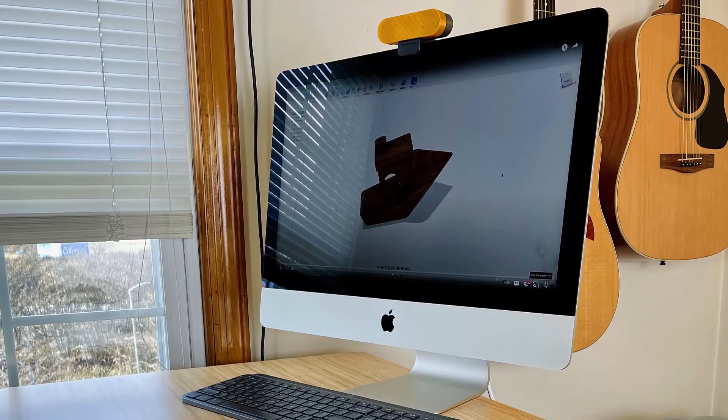those for this video. So I just bought this new motorized standing desk, and for some reason lately I've really been into desk aesthetics. A leather mouse pad, a new Logitech MX3 mouse with the matching keyboard. I decided that a charging stand that matched the design of my iMac would be a nice touch. So I designed my own charging stand and 3D printed it. It's my mini iMac watch charging stand.

I'll jump into the Fusion 360 design in a minute, but first let me walk you through my approach. I designed this in 3 separate bodies: the charger holder, the stand, and the screen. The charger holder is designed to allow the charger to have a friction fit. It's very satisfying when you get this just right. The stand attaches to the charger holder, and the slit to allow the cable through also functions as a spring to allow for a secure fit and easy removal.

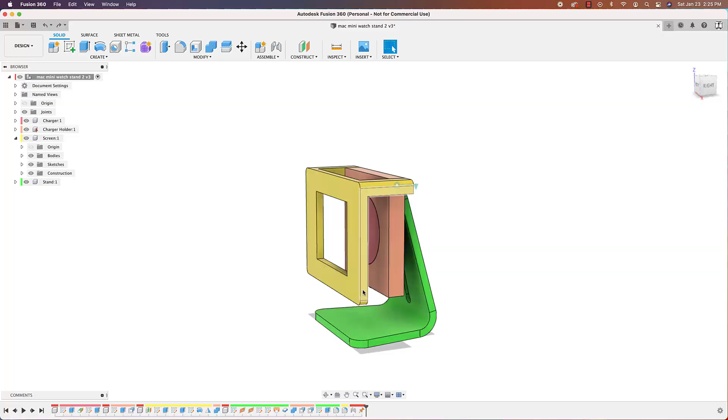Next, I wanted the screen to be able to swivel back, allowing you to easily place your watch and then simply swing it back into place. This type of hinge was created by modeling a little dimple that could rotate within a groove. These are excellent techniques that you'll want to take advantage of in your own designs.

After 3D printing the screen, I was able to easily snap it into place, and as you can see, the hinge mechanism worked exactly as intended. Now I can simply attach my watch and I've got the perfect smartwatch charging companion. You know, it's the little things in life.

This video is a bit longer than what I usually make, but that's because I cover a lot here. I'm going to approach this design by using components instead of simply making separate bodies for each part. You'll see the advantage of doing this as it keeps your timeline for each part neat and organized, so that it's going to be a lot easier to come back and make changes. Designing with components also gives you the ability to add joints between your parts. I'll demonstrate this by applying a revolute joint between 2 components.

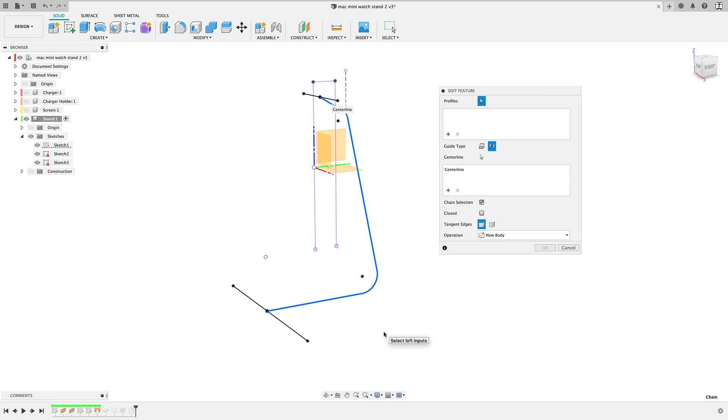I'll also touch on how to approach designing 2 parts that need to fit together, and I'll even jump into the surface environment to show you a neat trick to loft lines together to get unique shapes. I use this approach to easily design the stand. Alright, I've got a lot to cover, so let's dive in.

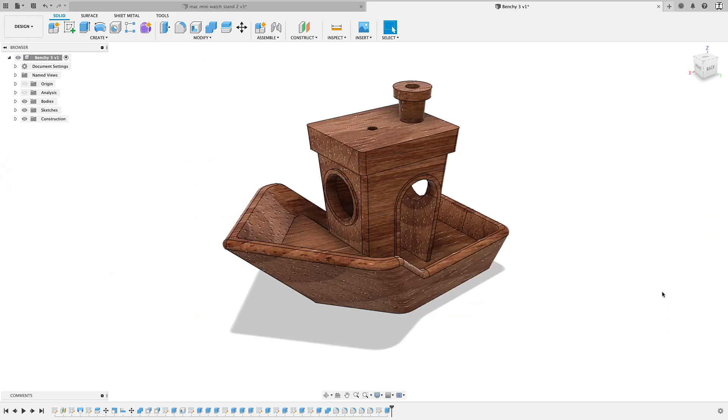Alright, let's dive into Fusion 360. We'll begin first by modeling the charger unit here. And if I remove the rest of these components, you'll see it's basically just an extruded circle, and the bottom part here, that stem that represents the wire coming out of it, is basically the same thing.

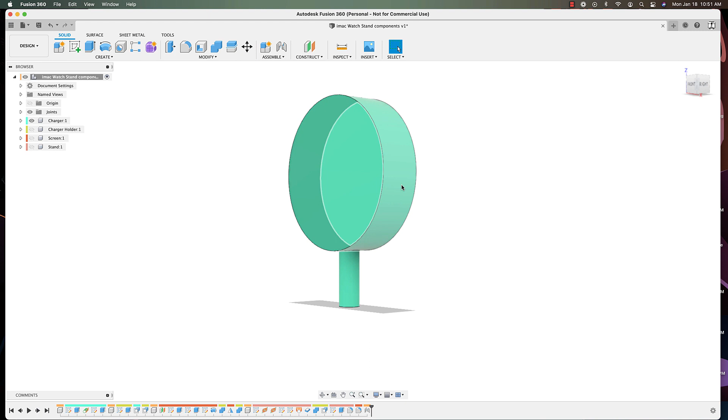So we're not going to 3D print this part, but you'll see that it's really important to actually model it because the rest of our design is going to be dependent on this part fitting perfectly within the parts that I'll actually be printing. So I'll create a new design here, and let's first save our design. So I'll just click save and give it a name.

We're going to tackle this design with components instead of just creating bodies. So we'll first right click and go to new component. I'll give it a name, and I'll just call this charger. Enter, and then we'll create a sketch on the ZX plane here.

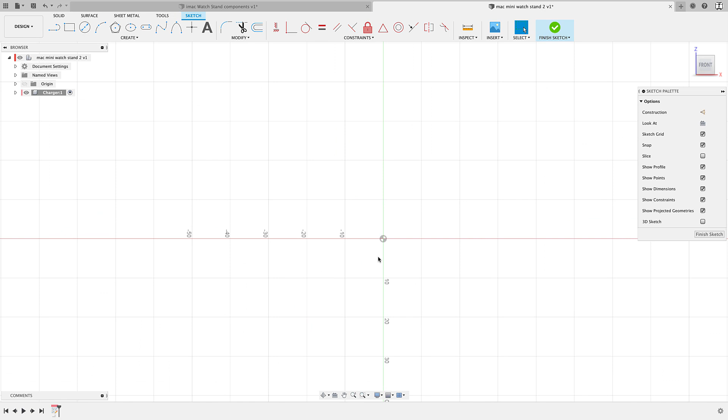I'm going to start with a circle, so I'll hit C on my keyboard for center diameter circle. I measured this with my caliper, and it's a diameter of 27.6 millimeters. I'll create that, finish sketch, and E for extrude, select my circle here, and then we're going to go out 7.6 millimeters, which again, I measured with my caliper.

Now you'll see it came in red. When you're working with components, you can have it automatically toggle colors of your components by hitting Shift N. So you can see it goes back to the default color, and if I hit Shift N, every new component I create is going to get a new color, which makes it easy to distinguish components. Also, you'll notice on the timeline here, it'll separate your timeline by the color of that component.

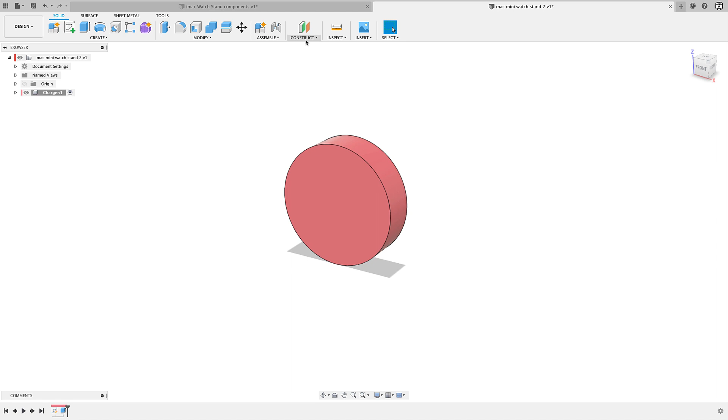Okay, next, to create the stem part that comes out of it here, where our wire is, I'm going to start with a tangent plane. So I'll go to construct, down to tangent plane, and I'm going to select that bottom surface, and it's going to create a tangent plane right there. I can change the degree here by moving that widget, but I'm going to leave it where it is.

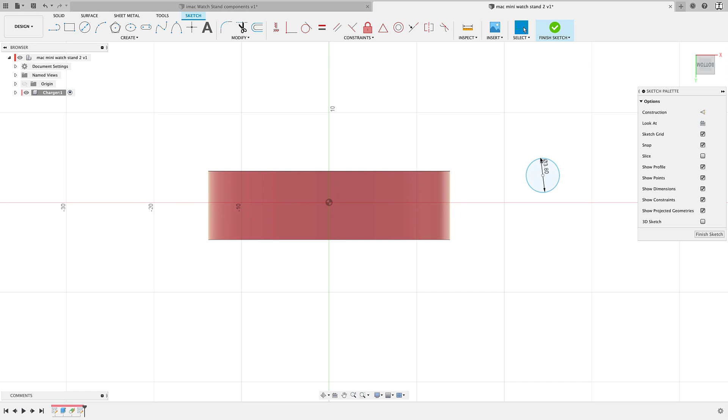Click OK, go to create sketch, choose that bottom plane, and then I'm going to create another circle here. C for center diameter circle. Now I also measured the wire, and it came in at 3.8 millimeters, so I'll type that in. And L for line, I'm going to draw a line going right down the middle here. And then I'll select that line, hit X to make it a construction line, and then I'm going to move the circle into place with just one click.

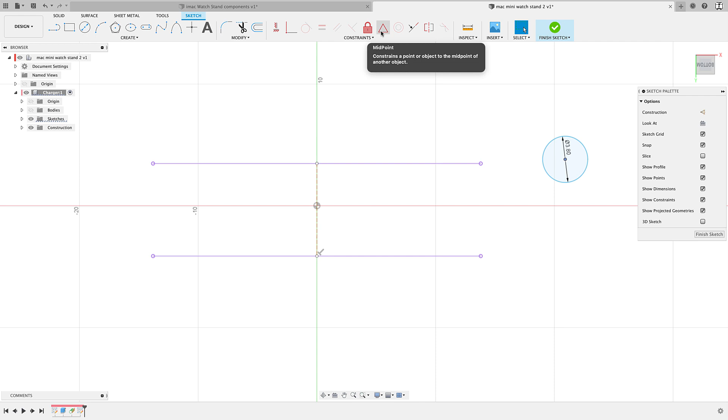Here, let me remove the body there so we can see that line a little better. And the one click is simply enabling my midpoint constraint. I'll click on the circle, click on that line, and it's going to put it right on that middle there. Okay, next I'll finish that sketch. Let's bring the bodies back into view.

E for extrude. I'm going to extrude this down 10 millimeters, and then we're going to go to where it says direction. We're going to change that from one side to two sides. We're going to bring that up. Now be careful, because once it's going through an object, it thinks you want to cut, so I'll have to change that back to join. Click OK. All right, and that's our first component there, and that's our charger.

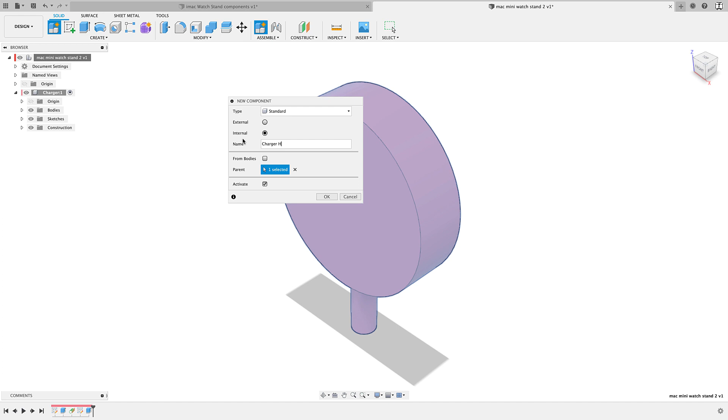Okay, next we're going to create another component, and to do that we're going to right click on the top of our browser where our name is here. We're going to go to new component, and we'll call this part the charger holder. This is what's going to hold the charger in place. So if I go back to my previous design, that's going to be this part right here.

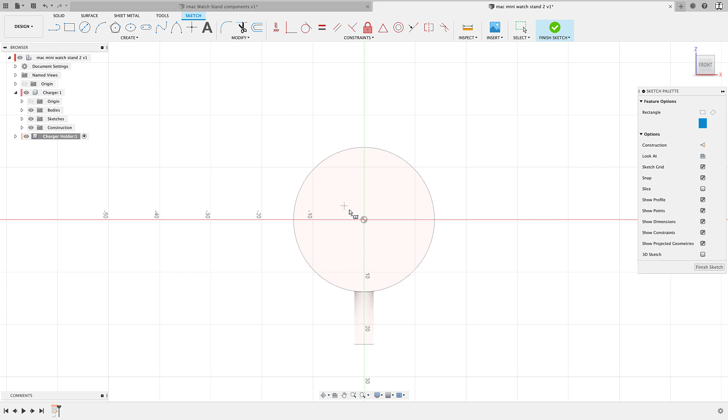Okay, so to do that, we're going to create a sketch on, again, the ZX plane, and I'm going to start with center rectangle. So create, down to center rectangle. We're going to reference that origin there, and this is going to be 45 by 45 millimeters. So we'll create that. Now what I want to do is extrude this out. If I click on this profile I just made and hit E for extrude, it's basically just going to extrude that block.

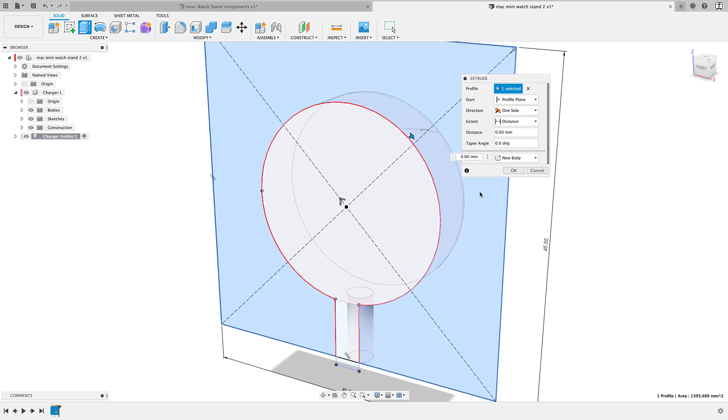But what I want to do is extrude around the charger I made, and this is where modeling that charger first really comes in handy, because what I can do now is project it. So P for project, and I'll click on bodies here, and I can reference the outline of that charger. So I'll click on it and then click OK, and there's that outline. Now if I hit finish sketch, E for extrude, it's just going to extrude the profile between my square here and that projected body.

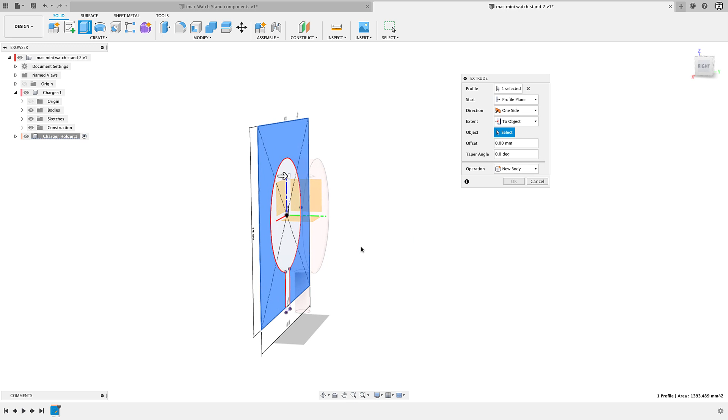Then I'm going to extrude that out, and actually I'm going to reference the back side of that charger. So for extent, I'll change that from distance to to object, and then I'll select the back here. You can still see it's shaded or grayed out, but you can still reference that back surface.

And new body, click OK. Now I can see that I have that perfect cutout of where the charger is going to snap into. Now one thing I need to do is give this a little bit of a clearance, because I am going to fit that right into place.

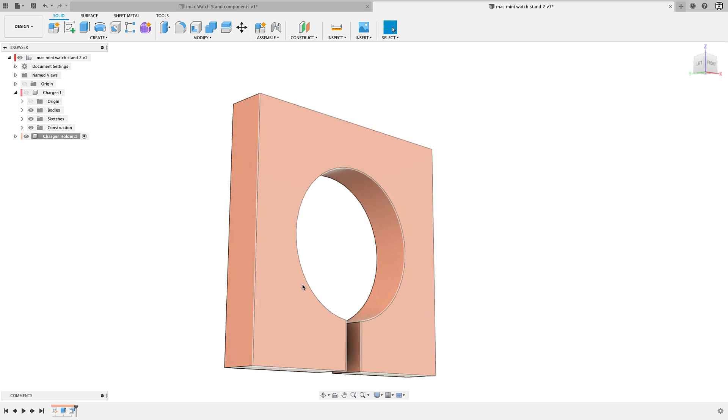So let's untoggle the visibility of the charger here. I'm going to hit Q, or go to modify and go to press pull. You see the shortcut Q there. Select that surface there, and for my clearance I'm going to do a negative 0.1 millimeters, and it's just going to make this just a little bit bigger, allowing that charger to snap fit into place.

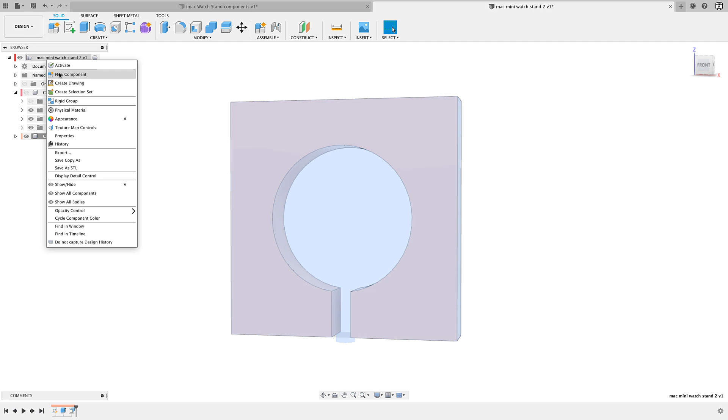Okay, that takes care of the charger holder for now, and next we're going to go ahead and create the screen, which is this part here. Okay, back to our design. Now to create that screen, we're going to make that also as its own component. So I'm going to right click, go to new component here, and let's give this one a name. We'll just call it screen.

And we're going to start by constructing an offset plane. So construct down to offset plane. We're going to select that ZX plane. I'm going to go out 12 millimeters. So you can see here, -12, click OK. And then I'm going to create a sketch right on that new plane I just made.

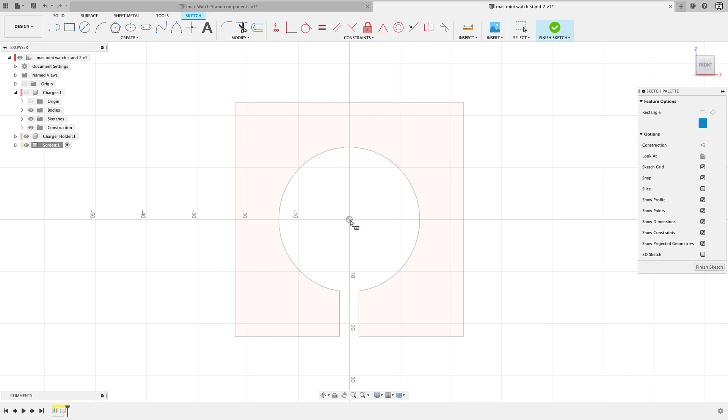And again, we're going to start with our center rectangle here. Reference that center point, and I'm going to go out. The height is going to be the same as my charger holder, so we're going to go 45, but the width is going to be 60. And I'll create that, and then I'm going to create a smaller rectangle here, and this is going to be the cutout. So this is this shape right here, and if I reference this, I can see that it's 34 by 28. So let's go ahead and create that.

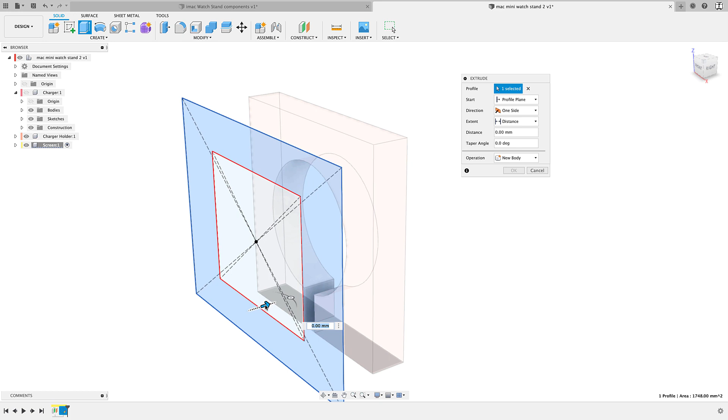We'll go to create, down to rectangle, center rectangle. We're going to make another rectangle, and that was 28 in height by 34 wide. Hit enter. Okay, now I'm going to extrude this, so finish sketch, E for extrude, I'll select that profile there, and we're going to come this way, +3 millimeters, and click OK.

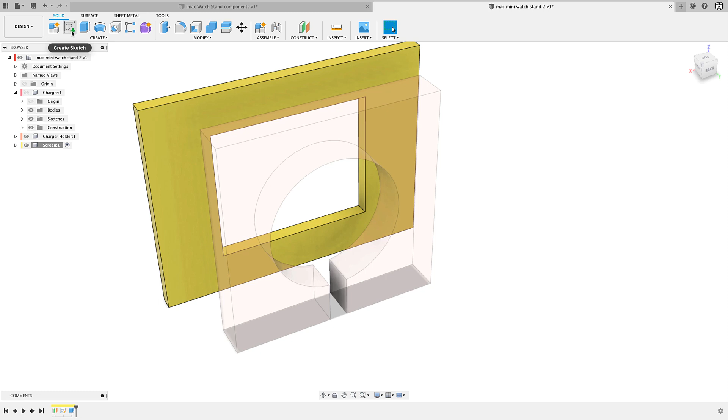Okay, so we have that there, and next what I want to do is have these arms that are going to come out and extrude out to the back edge of the charger holder here. So we'll create a sketch on this back surface here, and I'm going to create a rectangle. So R for rectangle, I'm going to reference that edge here, and I'm going to come down and reference that right edge here of the charger holder part. You'll see that line there, you can reference it.

And D for dimension, let's make this 5 millimeters, and the bottom here is already set to 7.5, so we can just click OK. Okay, next we can just finish that sketch. E for extrude, select that rectangle we just made, start dragging it out, and we're going to reference the back edge here of our charger holder. So extent is going to be to object. We can reference it, and you can see it's going to go out 19.6 millimeters, and we'll click OK.

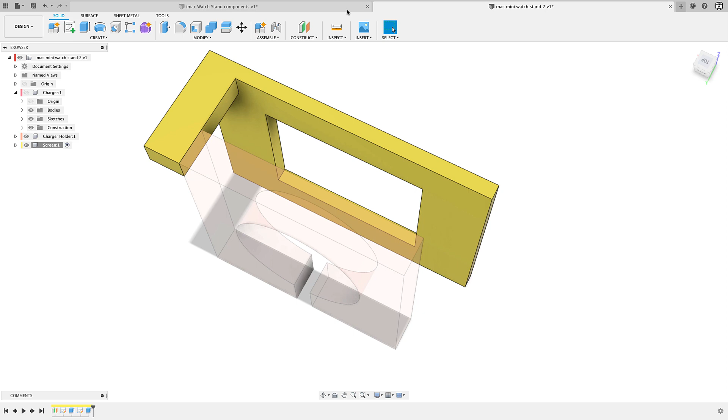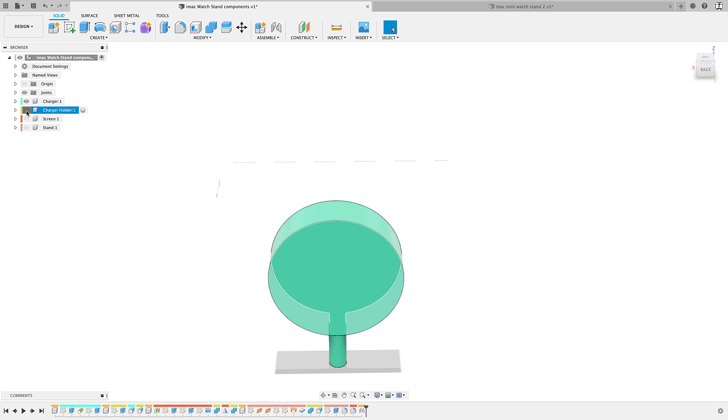All right, so the next part is really important. That's what's going to allow this little hinge mechanism here to work. Let's untoggle the visibility of that charger holder, and you'll see how that works. There's that little ball there, that sphere that I have there, and then if I bring back my charger holder, you see that it's got that groove in there. So let's go ahead and work on that.

And to create that, I'm going to create a sketch on the inside of this arm here. First I'm going to project the body of our charger holder. So P for project, click bodies, just click on the profile there and click OK. Now you see I have that outline there. So I'm going to hit L for a line and draw a line from that left corner to the bottom right corner there. And I'm going to select that line, hit X to make it a construction line.

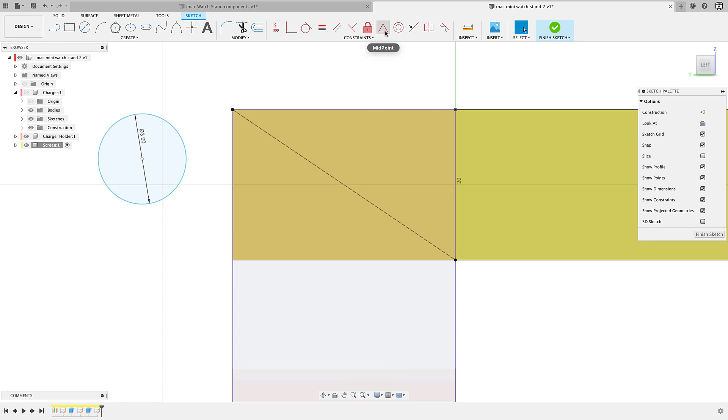C for a circle, I'm going to create a circle here. The circle is going to be 3 millimeters, and I'm going to do the same thing to put it in place. Just grab my midpoint constraint, select my circle, and then select my line. It's going to throw it right to the middle. Okay, so to create a sphere, here's how I'm going to tackle this.

I'm going to grab my line tool, so L for line, and if I reference the midpoint here and I go straight up, you'll see I get that dotted line showing me I'm right in the center, and then the X showing me that I'm on the edge of that circle.

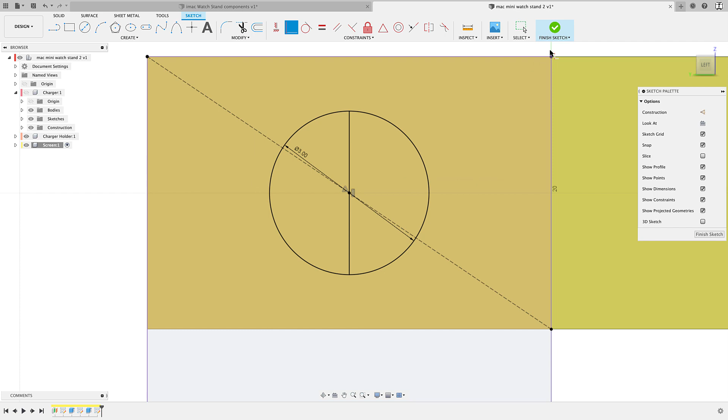I'm going to left click and go straight down to reference the other edge, and you'll see I have a line there. See, that line is blue, so to make sure I am actually right going through that middle, I'm going to grab my coincident constraint here, click on the line, and click on that center of that circle. You'll see that line turns black, and now I can be confident that it is exactly intersecting that center point. Okay, so next I'll go to finish sketch, and let's grab our Revolve tool.

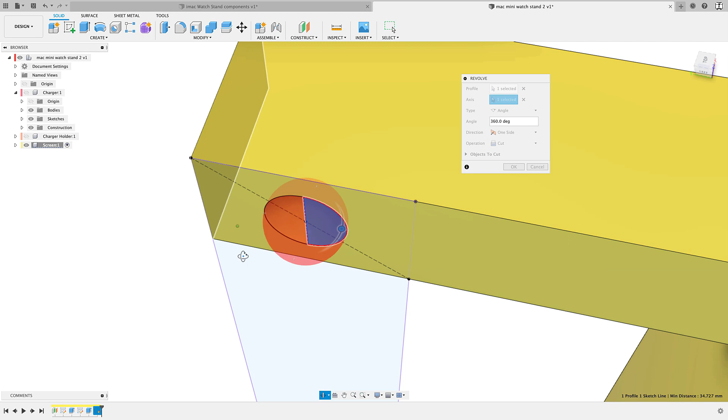I'm going to go to create, down to Revolve, select this right profile here. I'm going to have a hard time selecting it, so what I'm going to do here is untoggle the charger holder, and now I can select it. And next I'm going to choose my axis, which is going to be that center line that I made, and you'll see it's making a sphere, but it's doing a cutout. I don't want to cut out, I want it to join, so I'll change that to join and click OK. And there we have it.

Okay, next let's go ahead and mirror this to the other side. So we're going to go to create, down to mirror, and we're going to select features as our type. For our objects, we're going to select it right from our timeline. So I'm going to choose that extrusion and that revolve, and then I'll go to my mirror plane here, click on select. I'm going to select that YZ plane here, and you can see I have a preview of it on this side. Click OK, and double check to make sure you have your arm and your sphere right there. Okay, so we are good here.

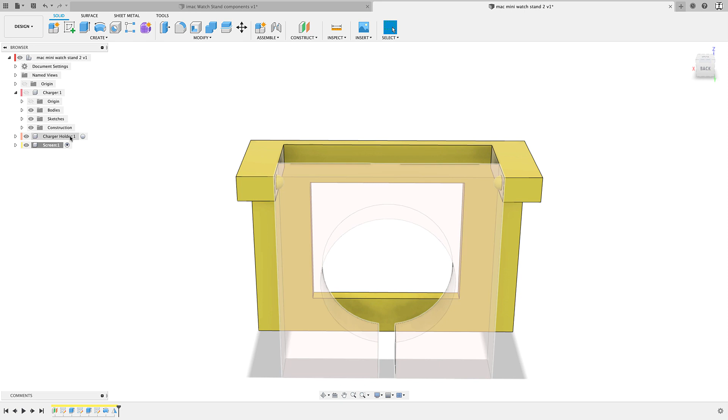So let's bring that charger holder into view. We're actually gonna click on the little circle here to activate it. What we're going to do is now use that sphere to cut out the shape here on that charger holder. So if I untoggle my screen here, you see that this is flat on both sides. Now when you do a Boolean operation, it's going to throw that feature on the timeline of the object that is your target body. So I'll show you what I mean. So we'll just go ahead and activate our charger holder now.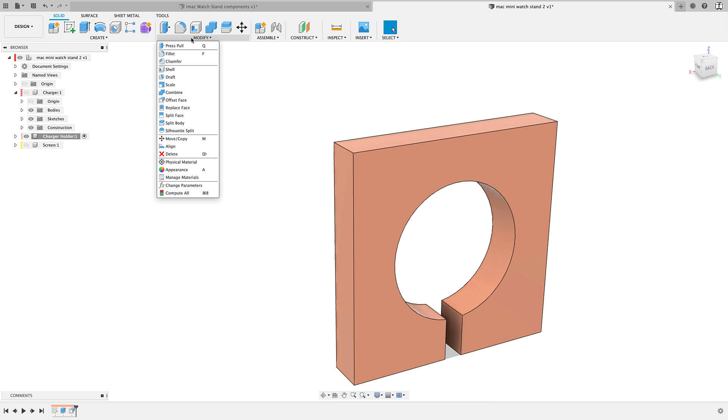And I'm going to go to modify down to combine. Let's bring our screen back into view. And our target body is going to be the charger holder there, and our cut body is going to be that screen. And we're going to want to keep tools here and then click OK. And you'll see that the timeline is thrown here. Even if I have a different component activated, it'll still throw it on the timeline of the target body here, which in this case is our charger holder.

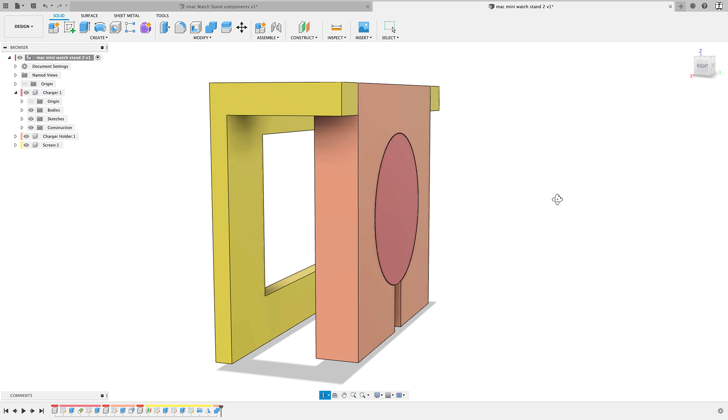Okay, so I'm going to go ahead and untoggle that screen here, and you can see that I have that cut out right there. Okay, let's bring everything into view. I'll click on the top of my browser here to activate all my components, and let's take a look at everything we have. So we've got our charger, this is our charger holder, and then our screen here. Okay, so one final piece to make, and that's going to be the stand. So let's go back here and turn on that stand, and that's this part here.

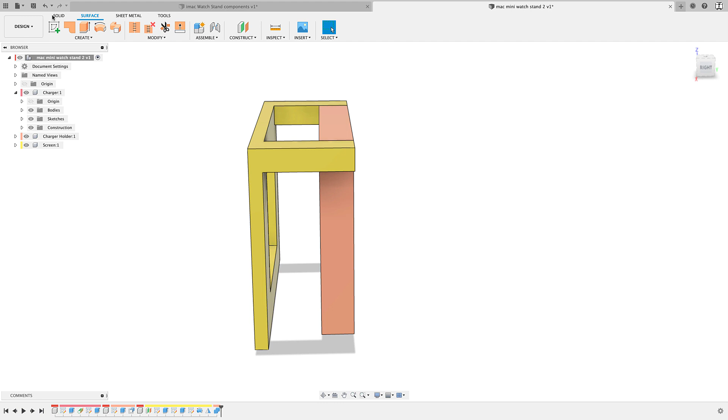Okay, I want to show you a unique way how I'm going to tackle this. It's going to require us to go into our surface environment and take advantage of some of the tools we have there. But to start, let's go ahead and create a new component. So we'll right-click New Component, and we're going to call this our stand. You see it automatically gets activated. And we'll begin by creating a sketch here. So we'll create a sketch on the ZY plane here.

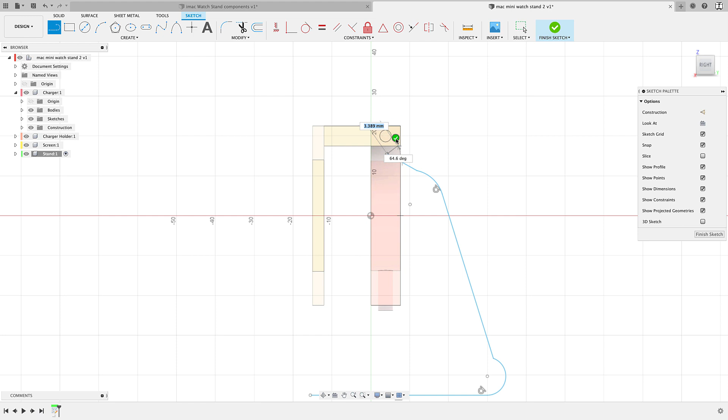And I'm gonna just sketch a rough sketch of my stand into place. So I'm gonna start with my line tool here. And I'm just gonna draw a line straight, and then I want it to curve. So I'll left click and hold. It's gonna transition to an arc. And then I'm gonna come up at an angle here. And then left click and hold to give it a slight arc. And then I'm gonna go at an angle like this. Okay. I don't need to see all the lines here, and it can actually get in the way because it'll want to snap or constrain into some of those.

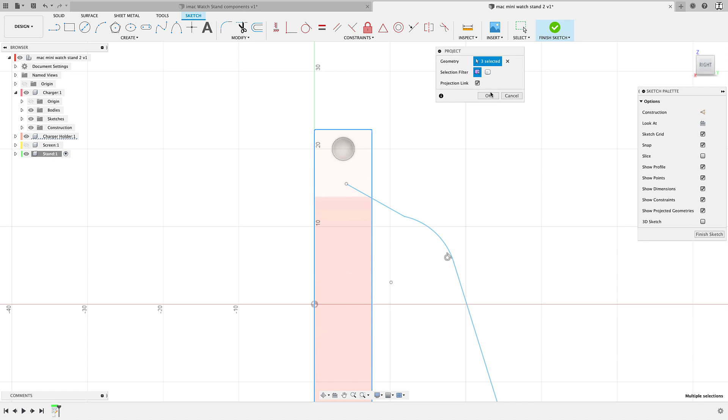So instead I'm going to hit P for project, and I'm just going to project the outline here. I just want that charger holder, so let's untoggle screen. Specified entities, I just want this line, the top line, and the left line here. Click OK. Let's untoggle charger holder. Okay, so let's see how we're going to approach this.

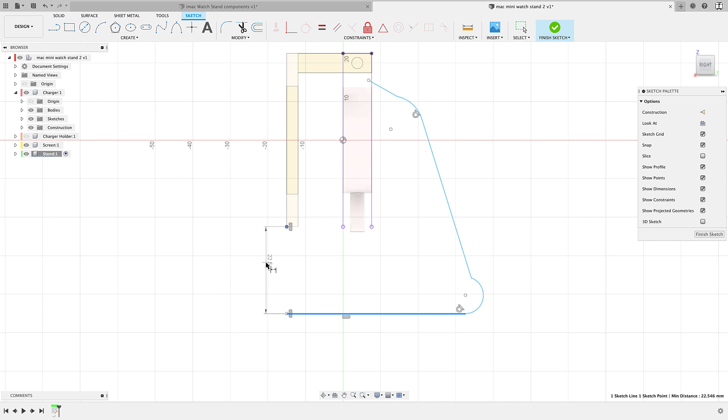To go ahead and set some dimensions and constraints, we'll first start, let's bring in that screen. So I want this edge here to be constrained to this left edge. So I'll grab my vertical constraint here, go ahead and line those in place. All right, now D for dimension, I want this line to be 15 millimeters from that edge. So I'll create that. So I'm coming straight out here. Let's start from the bottom and we'll work our way up, setting some constraints.

This arc here, actually let's make these tangent. You see how I have a tangent constraint here? I want this to be tangent to this line here. So I'm gonna grab that tangent constraint and select those two and do the same thing up here. I want this line to be tangent up here. Okay. So every point where I'm transitioning from a line to an arc, I want that tangent.

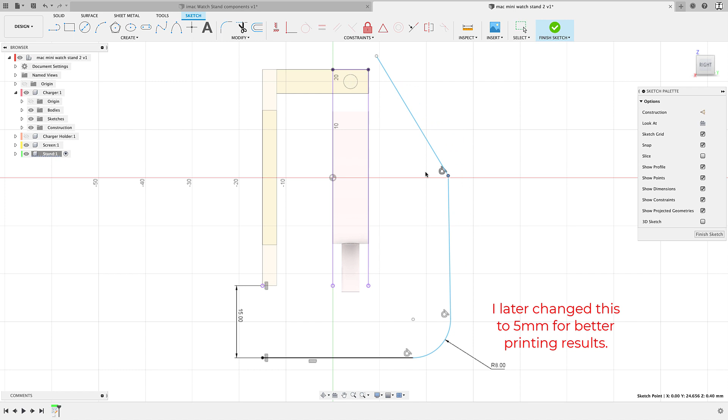All right, D for dimension, I'm going to give this arc here a radius of, let's go with 8 millimeters. And things are starting to be skewed a little bit. Move this back into place. But it'll fix as I go ahead and enter my constraint. So basically, I played around with this a bit to get these dimensions that I want. So I didn't get it on the first try. But now that I know what they are, I can come back and basically create them as I go.

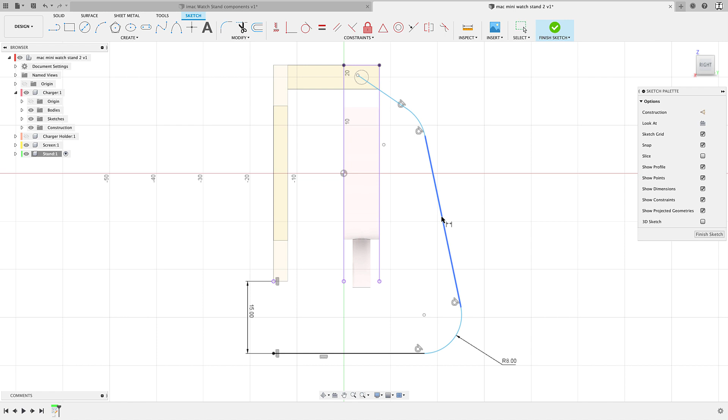So this line here, I know I want that to be 42. Oops, let's hit escape first. Select just this line. We'll make that 42 millimeters. This arc, I want it to be 3 millimeters. Okay, now this line here, this part is really important. The reason I want this line to come at an angle and not go straight, here, let's go back to that original design here, and let's remove everything from stand, except stand.

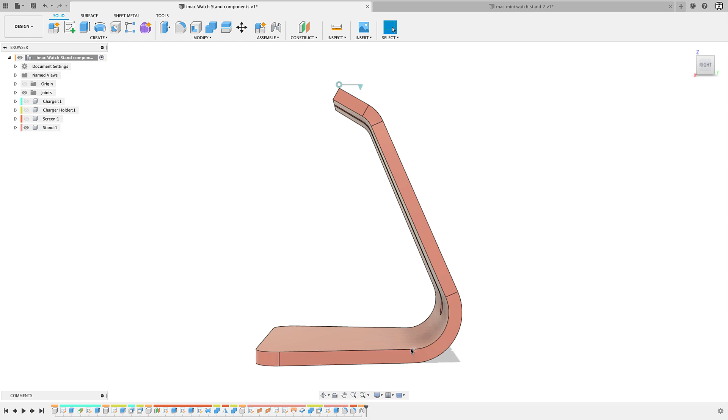So I want this to print exactly in this orientation. So when I 3D print this, I want it to go like this. Now, if I make this come at 90 degrees and it's going straight, that would mean I would have to build supports or change the orientation of how I print it. So the best way to 3D print this without having to build supports is to actually have this come up at an angle. And that is going to join into our charger holder. And if it comes at an angle like that, then I don't need to build supports because that's self-supporting right there. So that's my purpose for designing it like that.

And so what we're going to have to do is make this angle here. Go ahead and give that a dimension. So I'm going to hit L for a line. I'm going to draw a line straight up here from that arc. Let's make that a construction line, and then D for dimension. And I'm going to go with 60 degrees here because I know my printer can handle a 60-degree angle from the vertical. Now, usually you may have heard that the default is 45 degrees, so you may want that to be a little bit steeper, but I'm using a Prusa, a Mark II, and it can handle 60 degrees pretty well.

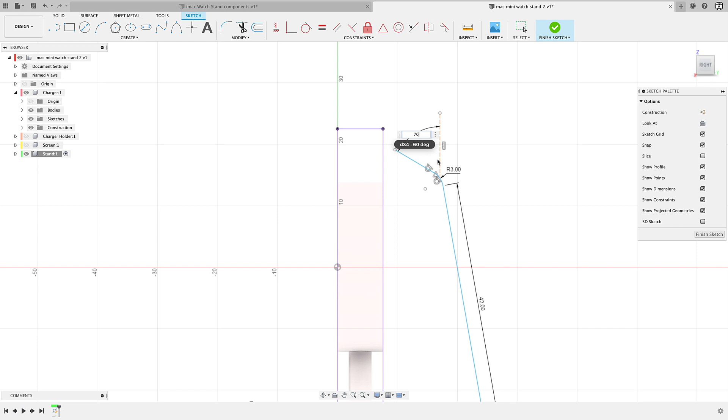And the shallower you go, the more you try to get away with that. So if I go at 70 degrees there, that's going to have a harder time to print because now you're getting closer to vertical and you're going to need supports. So you may want to play around with your printer to see what you can handle, but I'm confident I can do 60 degrees, so I'm going to go with that there.

Okay, and what I want is this line here to go into this part because I'm going to cut out that shape. So what I'll do here is I'm going to dimension this line. I know I want that to be 8 millimeters, but I want it to be 2 millimeters from this left edge here. So I'm gonna go ahead and move that into place. And I also want it to be 4 millimeters from the top here. So I'll place that. Okay, you can see it's fully constrained now. And I know I kind of did a lot there. So you may have to rewatch this to see everything I did, but just a quick recap.

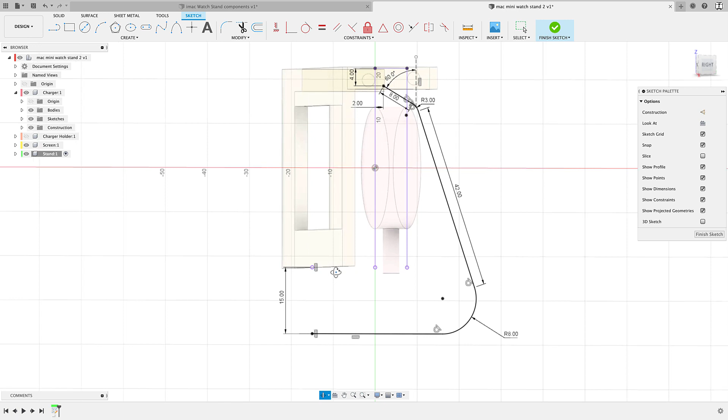15 millimeters that I referenced the bottom of that screen here, 8 millimeters on this arc, 42 millimeters on this line going straight, 3 on that arc here, and then this is 8, and then I dimensioned it 2 from the side and 4 from the top. Okay, and then I'm gonna click on Finish Sketch, so I have this shape here.

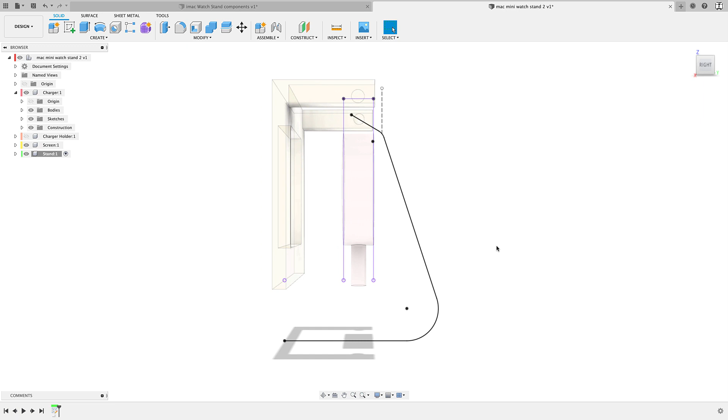And here's the neat thing I want to show you. Let me untoggle the rest of these components here. All right, so now to turn this line into this shape here, what I'm going to do is first create a few construction planes and then create some lines, loft those lines, and then thicken it. Okay, so let me show you.

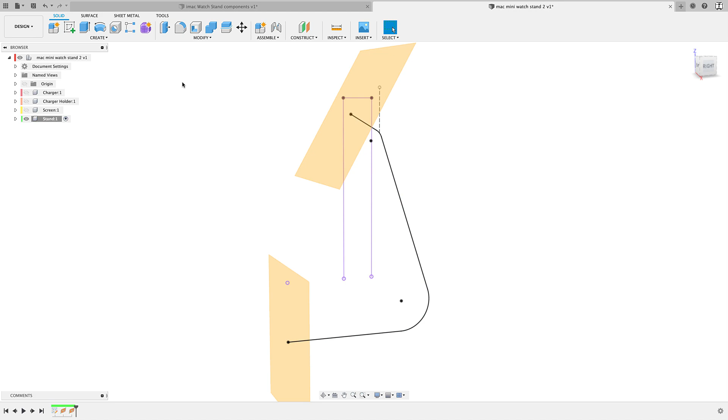We'll first start by creating our construction planes, and we're going to take advantage of the plane along path here. Click on that, select my line. Notice here the distance 2, I'm going to bring that all the way back so that it says 0. Click OK. Let's right click and repeat that operation. Select this line. I'm going to go all the way up, and this now says 1, so it's the full length. So I'm at opposite ends. Click OK. Create a sketch on this first plane I created here.

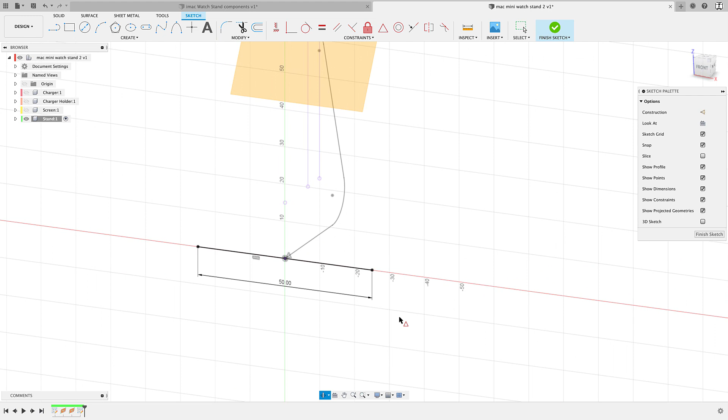I'm going to simply draw a line. I'm going to make that line 50 millimeters, and let's go ahead and make that horizontal, right? Applying a constraint here. And next we're going to move that line into place by using that midpoint constraint. Select our line, select our point right here. That's going to move it right into place. Finish sketch.

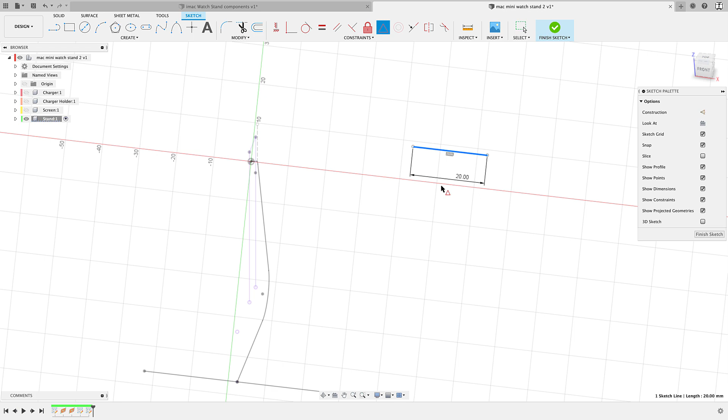We're going to do the same thing with this plane here that we made, our other plane that we made along that line. So L for a line, I'm just going to draw a line, again making it horizontal there, and D for dimension, let's make that 20 millimeters. I'm going to use my midpoint constraint to select my line, and then you want to make sure you select the right point here, and it's going to be right there at the end of that line. Click Finish Sketch.

Okay, so now I want to loft this line to this line, and I can't create a loft within my solid environment between 2 lines. You could only do that with profiles, but you can do it in the surface environment here. So I'm going to go to Create, down to Loft, select this first line, select my second line here. I'm going to choose my center line here for guide type, and for my center line I'm going to choose my line that I made, and you can see how it's now going to follow that line, transitioning from the 50 millimeters to 20 millimeters while following that center line that I made.

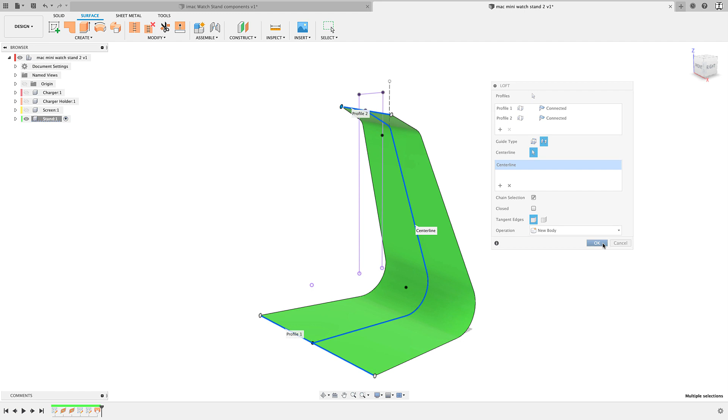Click OK, and next we're going to go to Create and down to Thicken, select that surface we just made. I'm going to do a -3 millimeters. So you'll see -3 because I wanted to extrude out and not inwards. So that negative sign is just choosing that direction. Hit enter, and there's my stand right there.

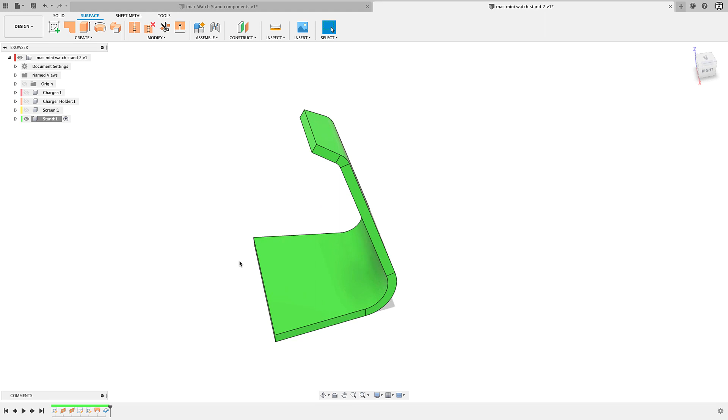Okay, let's go back to solid and let's bring that charger holder into place. You can see where it is here. Okay, now we're gonna have to cut out the stand from the charger holder. And to make the point here that I showed you before, that depending where it's gonna add the element is it's going to be your target body. So even though I have stand here activated, watch this.

If I go to Modify down to Combine, select the charger holder as my target body, and then my tool body is going to be my stand. Keep tools as selected. Look at my timeline here. The last thing I did was thicken. I'll click OK. I don't get anything added to that timeline.

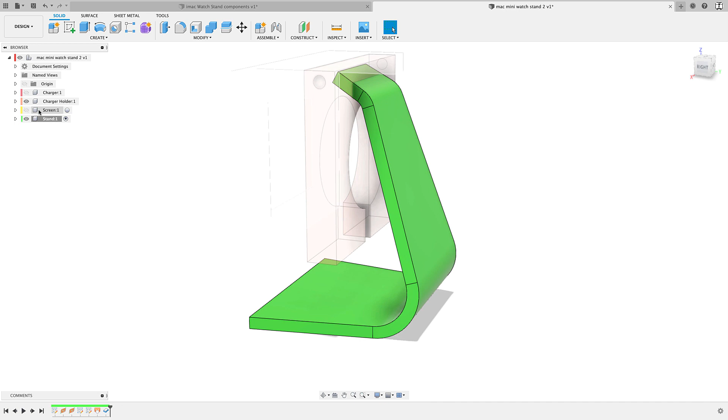But if I go and activate my charger holder here, you'll see that I have a combine operation there. And that's what it is. So it added it to this timeline because this was the target body. So just something important to note. Okay, so we're gonna stay here.

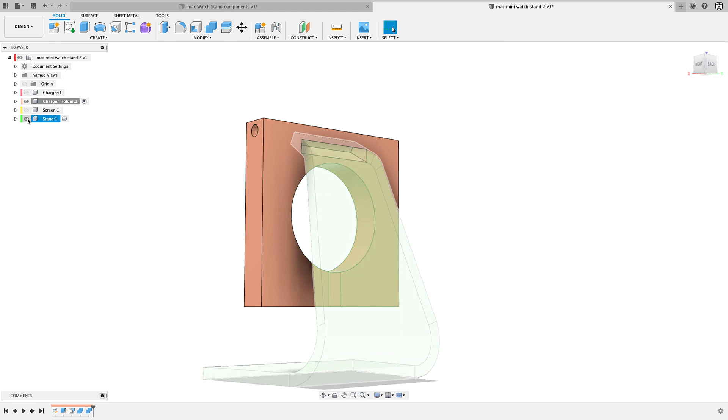I'm gonna untoggle the stand for a second because what I wanna do is I'm gonna go ahead and offset the top and bottom there. I'm gonna select both of those and hit Q for press pull and do a -0.1 millimeter. And that's gonna push those out a bit, helping that to fit. For the sides, I'm gonna do something different.

Actually, I'm gonna hit Q again and set both of these, but instead of going out, I'm actually gonna go inwards, and you'll understand why I'm doing that in a minute. But this time I'm just going to go -0.5 millimeters. Actually, not negative. I want positive because I want them to go inwards. So, all right, you may be thinking, why would I do that?

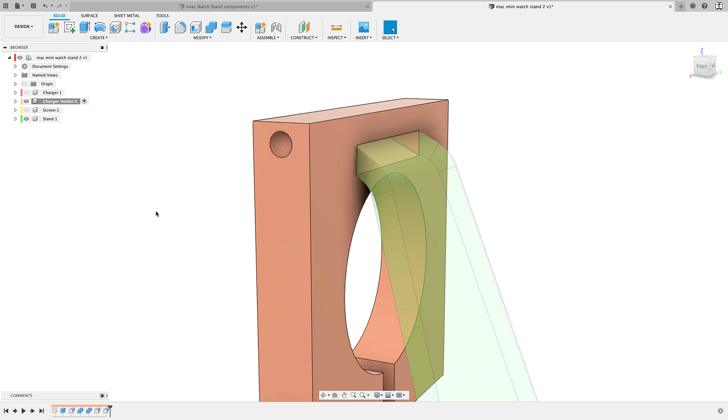Because now this is definitely not going to fit because the stand is wider. But I'll show you why in a second. All right, so now that I have that, let's go back to our stand. I'm going to activate that. And the next part I want to make is this cutout in the middle here.

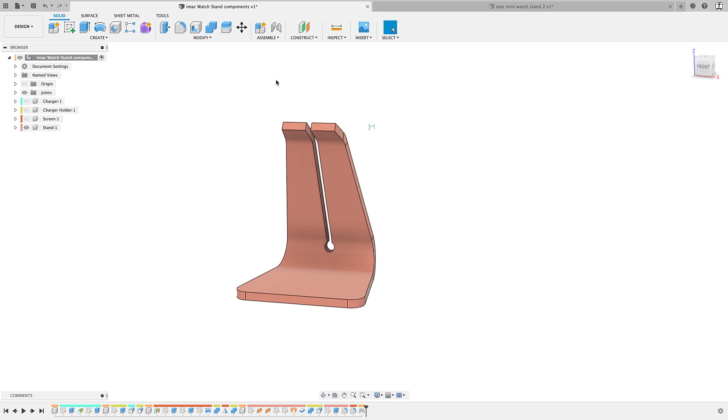This is going to allow me, when I slip the cord here for the charger, I want it to go through the hole here, and because it's so wide on both ends, the only way I'm going to be able to get it to go through is to put a slit here and slide it through. And so you can see here, this part actually acts as a little spring, so I can push those together, and that's going to push in, allowing it to fit right through this part right here.

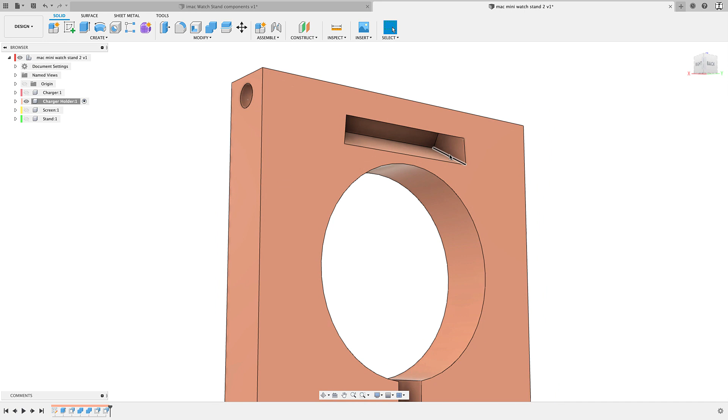Let's activate our charger holder, and that's why I can bring those in a bit, because when I let go, it's going to push out against it and hold this into place. So the top and bottom will be like a friction fit, and it'll be pushing out against the edges, holding it in place. So just a neat technique there to take advantage of when you need to put two parts together. So okay, let's go back to our stand.

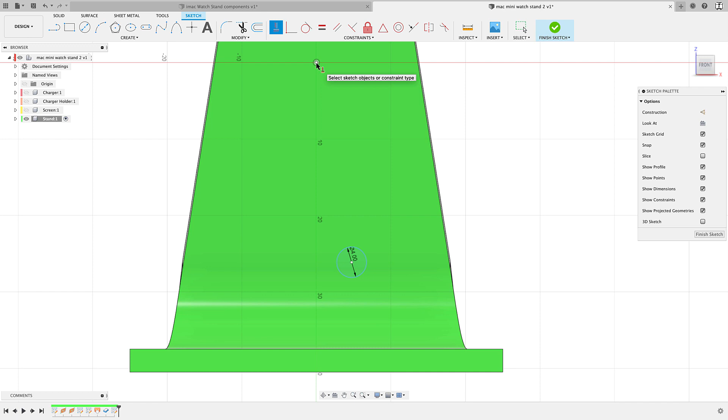We're going to activate it and untoggle our charger holder here, and we're going to create a sketch on our XZ plane. I'm going to simply grab a circle, so C for center diameter circle. Actually, let's make this 4 millimeters. I'm going to move it into place here and line it to the center point by using my vertical constraint. Select the center of the circle, select the point, go back, select my circle. There it is, D for dimension. Now that it's in place, I'm going to dimension that 30 millimeters from that origin point there.

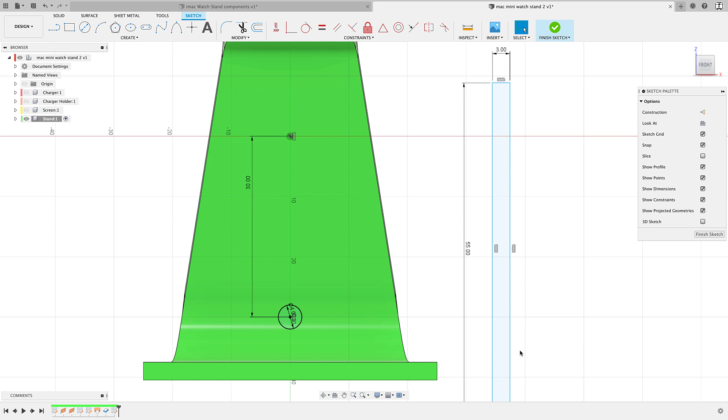And next I'm going to grab a rectangle tool, so R for rectangle. I'm going to make this 55 in length by 3 millimeters wide. Actually, you know what? We don't need to go 3, let's go 2. Okay, we're going to select our midpoint constraint, select the bottom of that edge, and select the center of our circle here. That's going to move that right into place.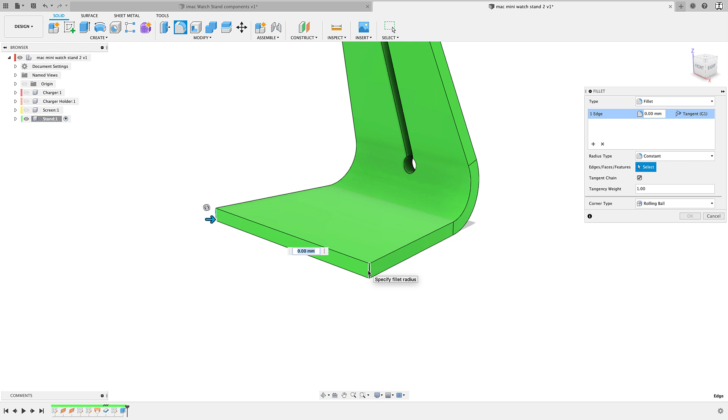Finish sketch. E for extrude, we'll select these 3 separate profiles, and we're going to extrude our circle plus that rectangle all the way through. We'll just change distance to all, click OK, and there we have it. So now, these edges can be squeezed together, and it'll enter the charger holder. All right, let's do some fillets here. So to match the shape of my iMac, I'm going to give these a 5 millimeter radius.

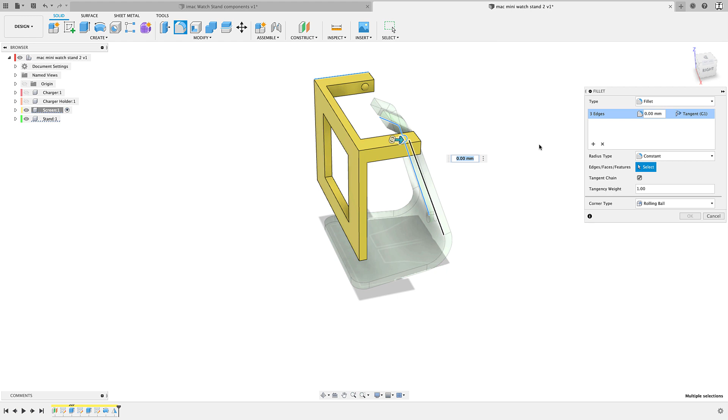And let's bring back charger holder, and let's activate that actually. Nothing we need to do there. Let's activate our screen here, and I'm going to do some fillets. I'm going to select these 2 edges. Oops. Let's reselect that. I'm gonna hit X here. Get closer so I make my selections right. That edge, this edge, and then this bottom left edge, bottom right edge. If you accidentally select a face, just click on it again, it'll deselect it. All right, we're gonna go with a 2mm fillet there.

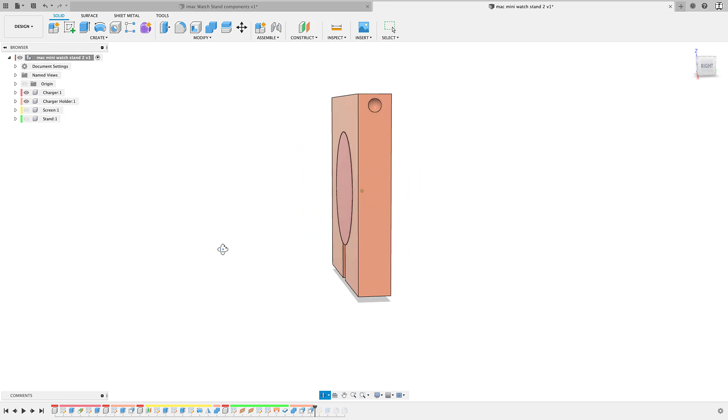Click OK. Okay, to see how everything fits together, we'll activate the top of our browser, and then we'll bring all our components into view. Actually, let's just start with our charger, and we'll see that's going to slide into our charger holder, which is going to give us a nice friction fit. And we've got our screen, which is going to connect with this hinge mechanism here. And then we've got our stand, which is going to slide right into this portion right here. And again, that's going to be a friction fit plus a little pressure fit.

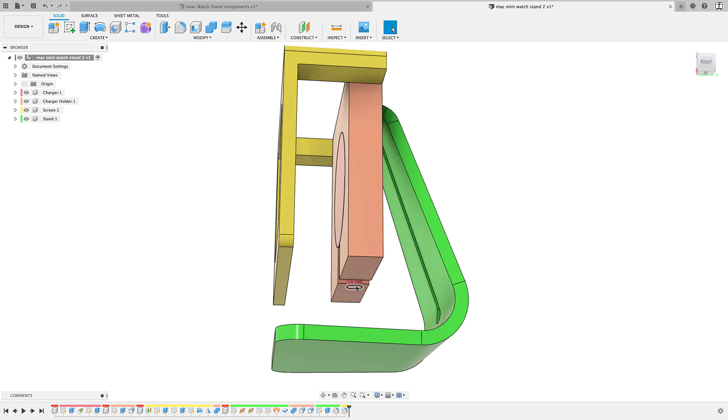Let's bring this timeline all the way back. And then we've got our groove there, so our wire is going to come through here. We'll be able to slip that through, and it'll go right to the back. So that's all good. And finally, I'll show you how the hinge mechanism is going to work. So we'll create a joint. We'll go to Assemble, and we're going to create a joint between the screen and the charger holder.

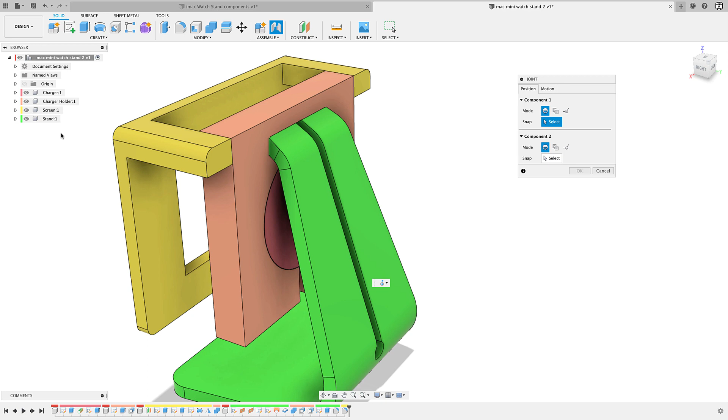So let me untoggle the visibility of charger holder for now, and I'm going to select just the circle here where that sphere is, the outline of that. And I'm now also going to bring back our charger holder, and we'll select the corresponding circle there. And you can see there, if I go to motion, it automatically went to a Revolute joint.

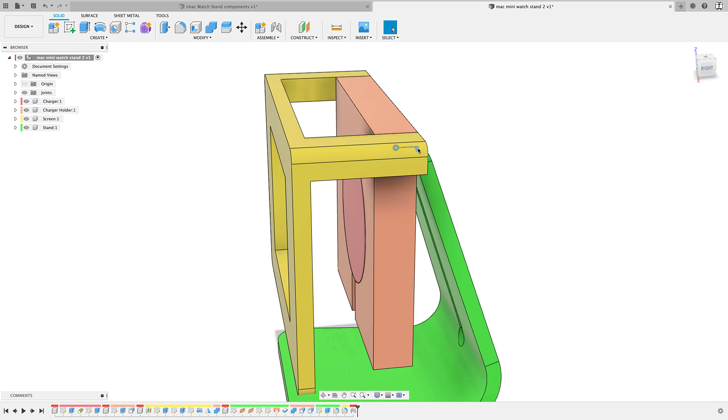It was just the last one I had selected, but you can see there's different joints here. Revolute makes the most sense. We'll click OK, and I'll do a separate video later jumping into joints because it's really neat what you can do with this. But now I can see here, if I just double click on that little flag there, you can see that I can simulate that joint. That's how it's going to work.

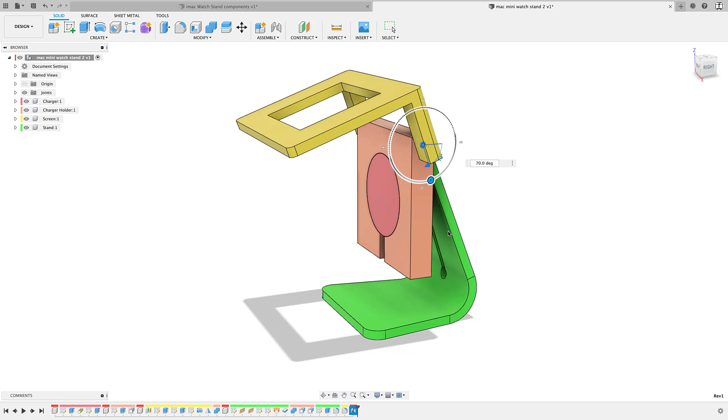So basically, I'll move this up out of the way. I'll place my watch here. It's going to magnetically snap to my charger, and then I can simply move this back down. So nice little mechanism there. And I can play with that. You can also do different things like set joint limits, but I'll jump into those in a later video.

You know what? There's one mistake I realized I did here. It's going to be a quick fix, and it actually is going to allow me to show you one of the major benefits of designing using components as opposed to just creating a bunch of bodies. And that's going to be how organized your timeline is. So for example, I realized that this charger here, I made it too thick. I was supposed to extrude it at 6.6 millimeters, and I actually did 1 millimeter too big. I did it at 7.6.

Normally, if you design everything as one body, you have a really huge timeline, and it's difficult to try to go back and find exactly where to fix that mistake. But when you're using components, all you have to do is just activate that particular component here. And all the features used to make that specific component are right there in your timeline, and it's just those that are specific to that component. So now it's easy to see what I had to do.

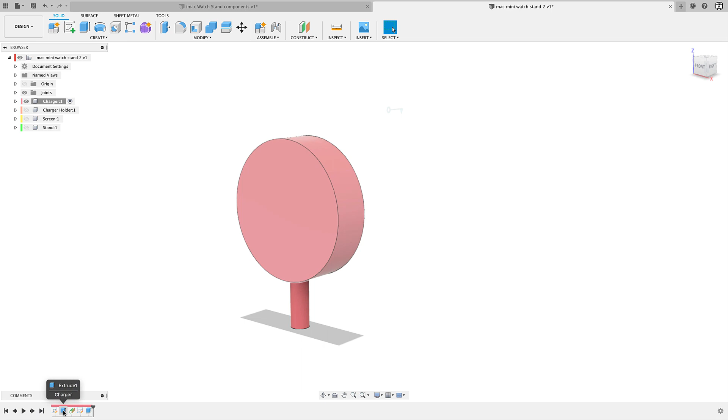For example, I made a sketch and then I extruded it. So I can just double click or right click and edit that feature. And I'm just going to change that from 7.6 to 6.6. So you see how everything is just neatly organized. And that's going to change that component. Not only will it change that component, but because when I made the charger holder, I made it reference the back of this. Watch what happens.

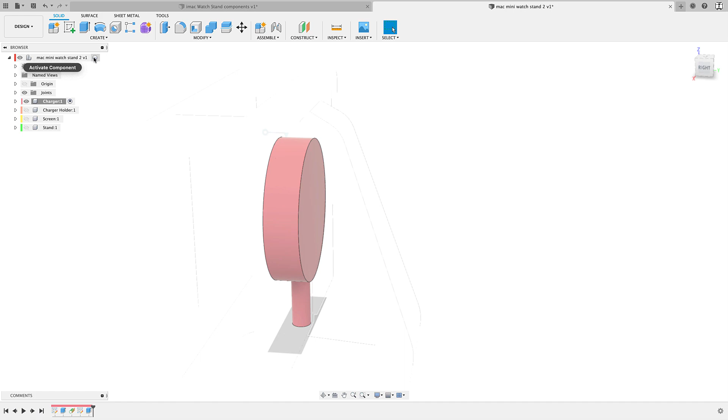Let me activate everything here. So if I bring all my other parts into view and take a look at this charger holder, that thickness also gets updated. See that it's 6.6. And then everything else gets updated because the screen here, when I extruded that, I referenced the back of this charger holder. So that also gets updated. So everything gets neatly updated. It's one of the powerful advantages of having that parametric ability in Fusion 360.

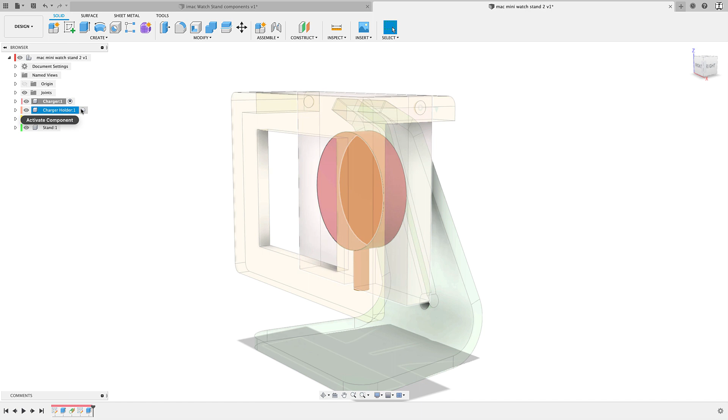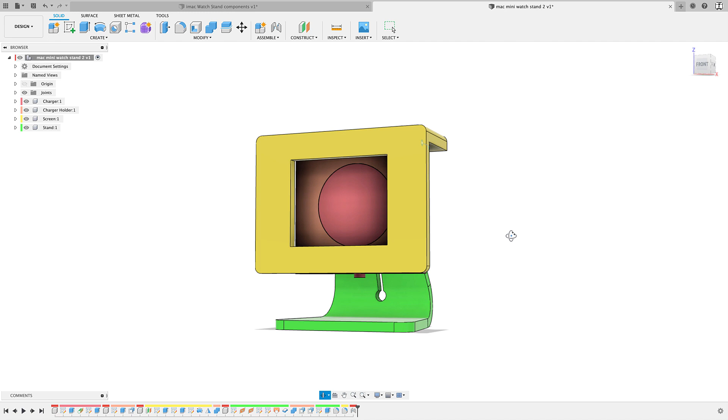But yeah, thought I would just mention this really quick to show you one of the benefits of designing with components is that you can go back and activate each one of these and you see that the timeline there is only specific to that particular component. So everything is very neatly organized. Okay, and that's our assembly here. Great little project. This looks great on my desk. So yeah, have fun with it and make your own, or use the techniques that I showed you here to do something completely different, taking advantage of these techniques in Fusion 360.